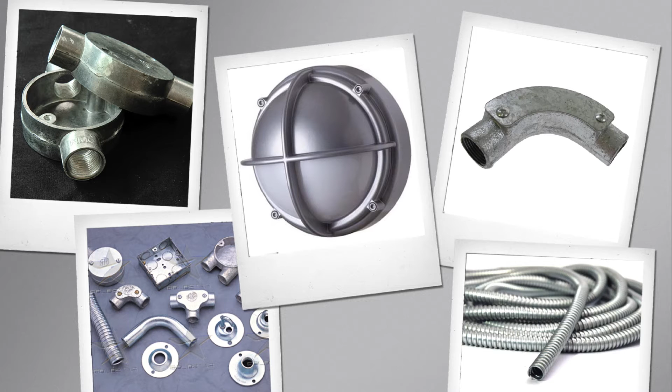But actually the complicated part was working out how to bring an electrical feed to each of these, through all the complex retaining walls around the perimeter of the site, through the granite sett finishes and so on. There's plenty of power downstairs, but getting it up through the external works was complex. In some places, we needed to use exposed metal conduit, galvanized steel, that protects the electrical cables when they're out from damage, and they give you a way of rewiring in the future.

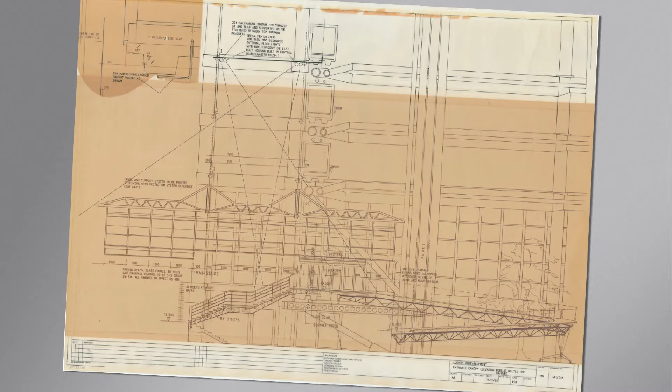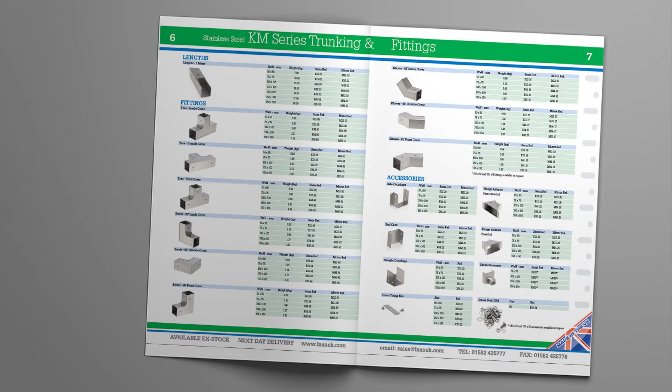Every conduit run was drawn in plan and elevation, and many three-dimensional sketches filling in the detail. I was really taken aback that an architect would want to understand every detail of such a dull engineering system. And more importantly, it meant I had to do all this research before I could give him the answer. So I owe the in-depth knowledge I retain to this day of fascinating conduit and trunking catalogues to this man.

Now, forward winding a few years and jumping from the micro to the macro, I found myself working again with Graham Stirk, this time on the initial iterations of the design that was to become the Leadenhall Building, literally across the road from Lloyds. Although both are predominantly office buildings, one was built for an owner-occupier and the other was a speculative development to be occupied by tenants yet unknown.

The wedge-shaped form of the building was driven by consideration of this key view of St Paul's. An obvious consequence of its wedge shape is the offset core, the only place where lifts, stairs and other services could reach the top of the building was on the northern side.

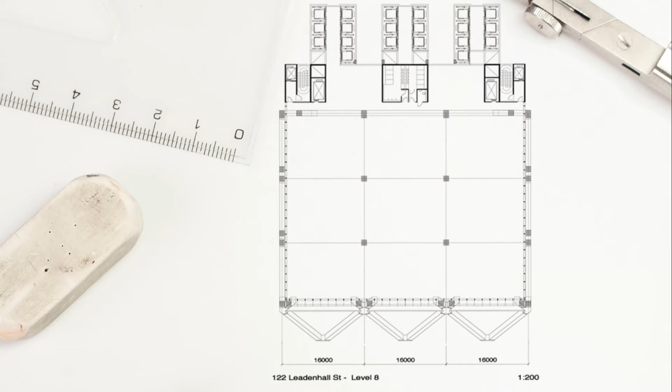Now, the building needed three banks of lifts, two goods lifts, two fire stairs, toilets, an air conditioning system for each floor, all to serve these future tenants. And for a while, we were struggling to find the right arrangement. It was difficult to meet the net to gross requirements of the developer, and the wall to floor ratio with the multiple lift cores that we began with was getting the thumbs down from the QS. It just wasn't stacking up as a viable floor plate.

I remember one key meeting when we hit upon the concept of a single core with all 22 lifts located across the full width of the site.

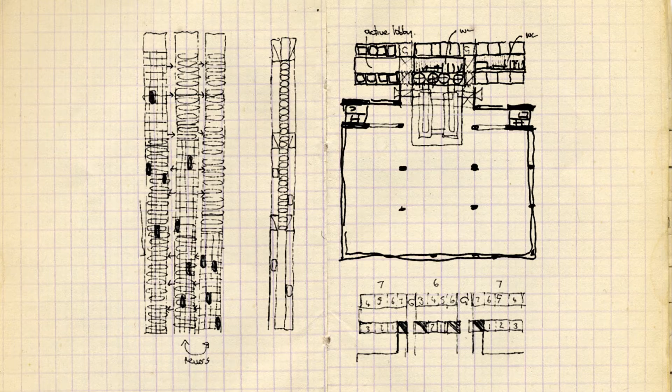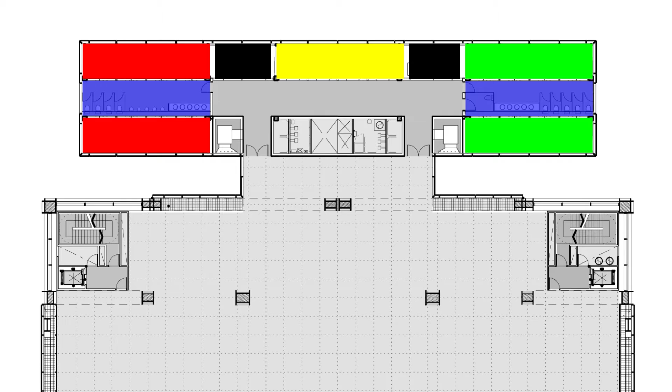This is the developed version of that same plan, with the high-rise lifts on the right, the medium rise on the left, and the low rise in the middle. And the black squares are the goods lifts. In the blind shafts of the high-rise and mid-rise, we can put the toilets on the lower levels, and then these jump across as the different lift banks become active. And finally, we squeezed the air handling units, a supply and a return, into these cupboard spaces on either side of the core. This move created a whole additional bay of office space, and we were rolling.

Although there were still 12 years to go, the power of a great diagram like this core stands the test of time throughout design development and the construction period, and it's legible to both lay and learned eyes in the final design.

Now, I think these two examples, the micro, the conduit design at Lloyds, and the north core at Leadenhall, are two examples of a design methodology known as systems thinking. It's a methodology that seeks to understand, optimize, and then organize all the components of a complex system. It's often used in other disciplines, used for designing businesses and the architecture of IT systems as well.

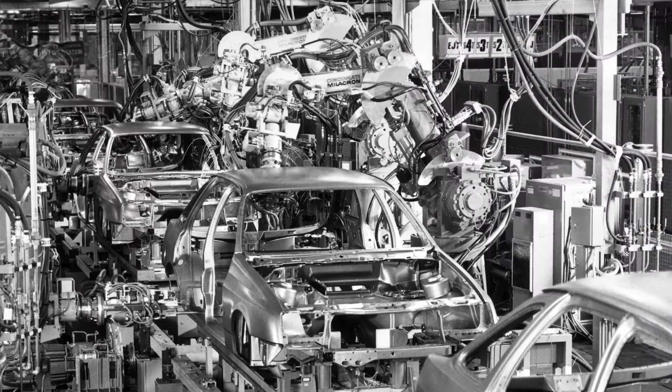In the world of buildings, it's particularly synonymous with the high-tech school of architecture. This really began in the 70s, 80s, when there was a growing frustration among many building professionals about the glacial pace of technological development in the construction industry.

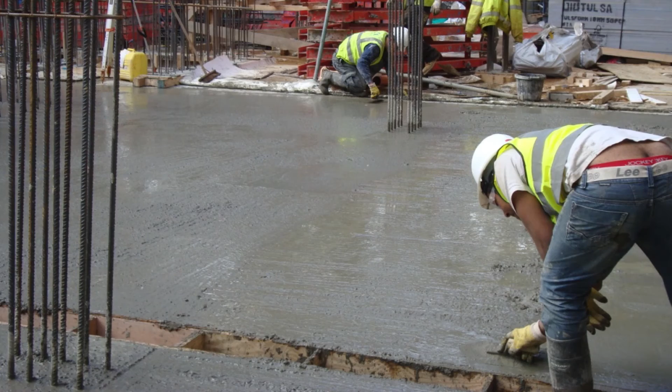This was at a time when we were still putting people on the moon, and when the automobile and aerospace industries, as well as the computer industries, were using new materials and new forms to rapidly evolve high-quality, highly reliable products assembled in new robotic factories. By comparison, construction seemed mired in messy, wet trades, and these required large amounts of labour on congested and poorly organised construction sites.

So one of the goals of the high-tech approach was to move more production off-site, and we saw the emergence of things like toilet pods and air handling pods that could bring a whole complex sub-assembly to site and plug in.

One second key idea often used in the high-tech approach is the concept of the servant and the served. I think this is Louis Kahn's original statement, that you should keep the part of the building that people use as straightforward and uncluttered as possible.

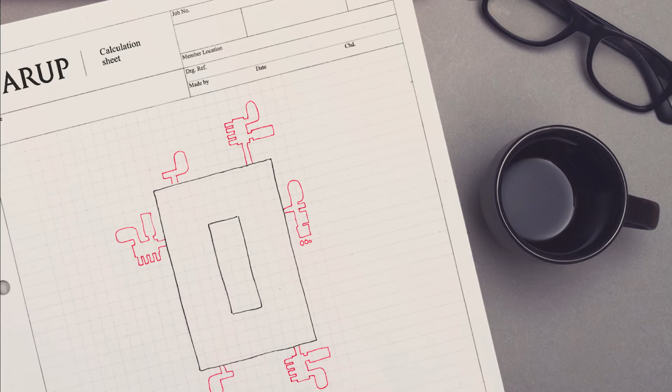So the Lloyds floor plan is a simple rectangle of usable space with an atrium in the middle. And around the perimeter are all the satellite service cores that provide the services, the vertical circulation, and the toilets. The square in the middle remains completely free for its intended use.

Linked with this is a goal of renewability, a recognition that building components have different lifespans. And by putting services and other systems outside the occupied zone, they're more readily reconfigured and updated. That's the theory anyway.

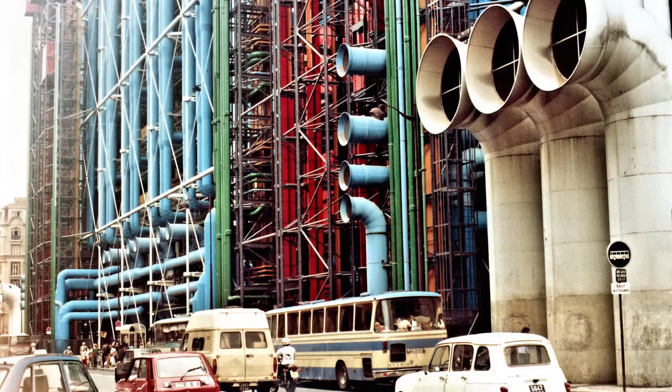Now, the high-tech movement, or school of architecture, really was a London phenomenon, surprisingly perhaps, that began in the 70s. Some people have described it literally as the body of work by Richard Rogers, Nick Grimshaw, Michael Hopkins, Norman Foster and their firms. There are sporadic examples in other places, but it's primarily a London phenomenon. And so one question is, why London?

The architectural critic Colin Davies has suggested that one enabler of the high-tech approach in London was the availability of engineering advice of the highest quality. Engineers such as Frank Newby, Felix Samuely, Tony Hunt, and Arup and all his august partners were here and ready to engage.

For those engineers, this was a great opportunity to fully engage. Some high-tech architects have said that they can't really make a start until they've had a formative conversation with an engineer to understand what the building really wants to be in terms of its technical form. For most engineers, this was quite a refreshing opportunity compared to the days when they would basically draw the structure and the services on after the architect thought they'd more or less finished.

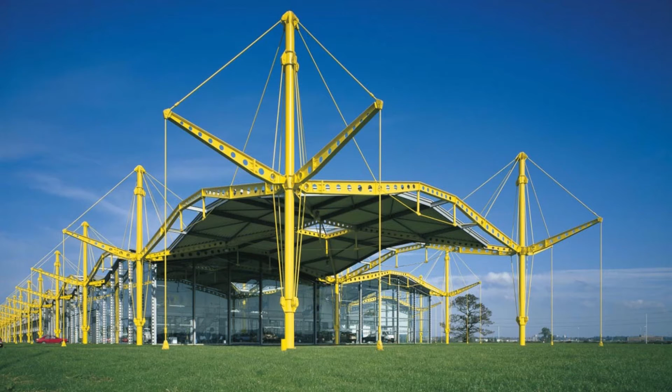Now the high-tech approach is most closely associated with things like these expressed steel structures, and many of the primary examples use steel in tension to create very lightweight enclosures. But the growing complexity of systems within buildings and the oil crisis of the early 70s put much greater emphasis on the planning and performance of building services within a high-tech building.

We saw building services engineers, such as Tom Barker here and Max Fordham, being invited to contribute to the formative stage of projects, not simply as they finished detailed design. Projects like Centre Pompidou are real graphic essays in the application of system thinking applied to services as well as structure.

I think this way of thinking led to a feeling of a shared endeavour between engineer and architect, with a number of shared goals. The first is a belief in technology and a belief that we, the design team, can harness it to create a better environment. In France, Peter Rice's understanding and exploration of glass technology helped create a new architecture of transparency and lightness.

At the Louvre, this included the two different glass pyramids that made the most of new nonlinear analytical techniques and methods of fabricating and fastening glass.

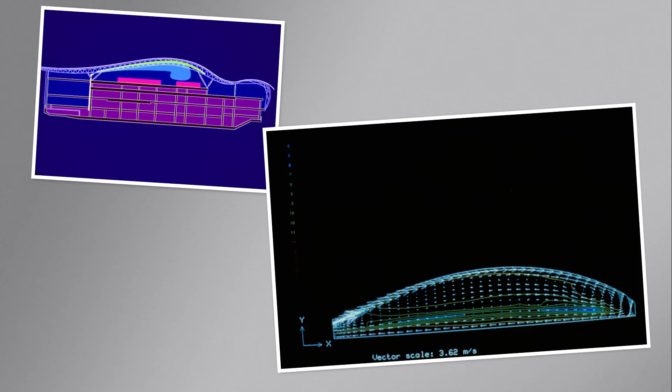Here, the form of the roof was primarily generated through an understanding of the trajectory of a cooling air jet that serves the whole of the upper concourse level - that's over 90 meters across.

This approach was really only possible because of the growing computer capacity and analytical skills we had to analyze every sort of pocket of air within that space. We could understand simultaneously its temperature, humidity, momentum, and direction. Over a week of computation, we could forecast where the air wanted to go and then wrap our building around it.

At the same time, the high-tech approach embraces the industrialization of building production and often wants to push the boundaries of current construction practice. As Peter Rice points out in his book, An Engineer Imagines, when industry resists a new idea, then the engineer has a special role in the design team to withstand these arguments and demonstrate the wrongness of the industry's position. And in this scenario, the engineer becomes critical and can save his soul.

Possibly. A second shared goal: function and efficiency. One of the tenets of high-tech is that really every design decision has a functional justification - things just don't appear in the design.

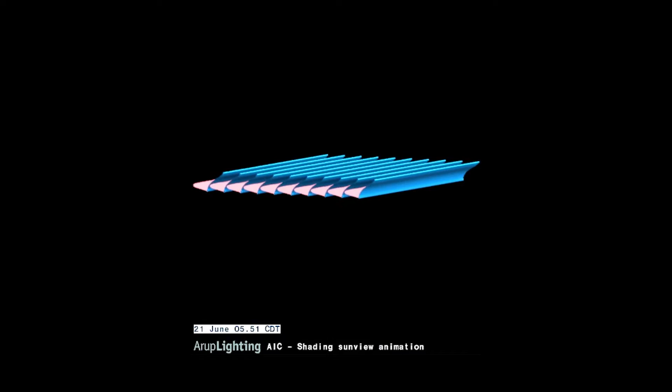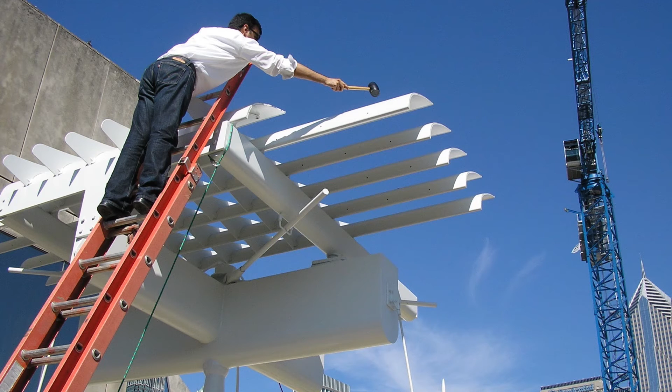One example I'd like to share here is the roof design of the Art Institute of Chicago, because it follows this principle. The components of the shading canopy above the third floor galleries, known as the flying carpet, are designed to keep all direct sun off the gallery skylights beneath. Every dimension of this shading system has been honed to the minimum by technical considerations: the solar geometry, ice formation, and wind-induced vibration.

This is one of our most senior acousticians working out the natural frequency of the structure by the age-old method of hitting it hard with a hammer and listening to the sort of bong it made.

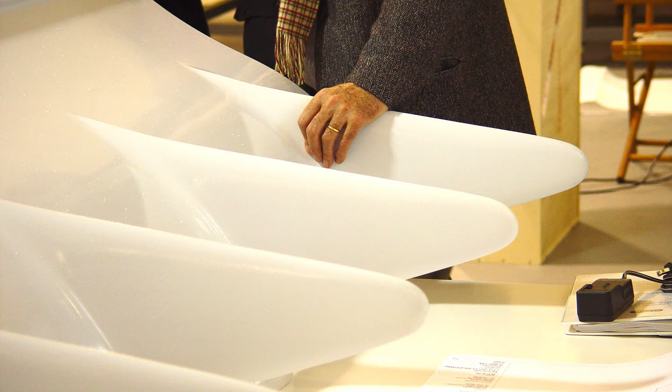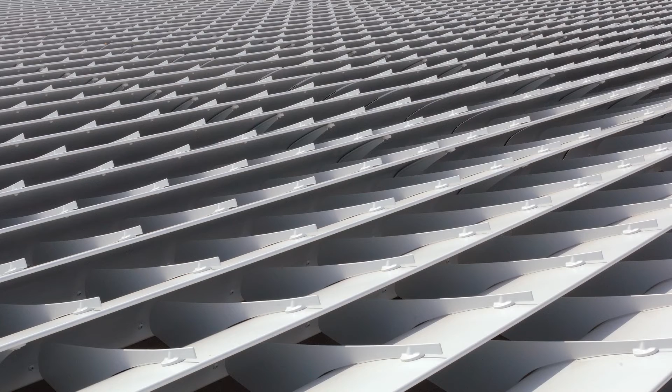In skillful hands, these elements become iconic parts within the overall building form. They become one of the signature architectural pieces, whilst also being completely functional. Every piece is necessary and just sufficient for the job it needs to do, but the ensemble together creates a rhythm of light and shadow that requires no further embellishment.

A third and linked goal is about legibility, all the way from a concept diagram through to the finished form. This is another Renzo Piano roof, this time at the Beyeler Foundation in Basel.

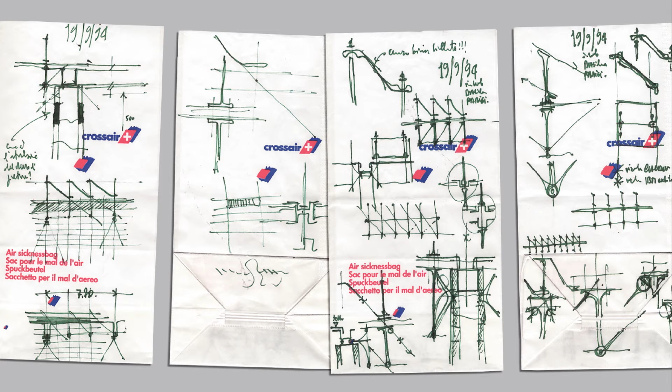These are the very first sketches created on air sickness bags from one of Renzo's flights, and it shows the beginning of the evolution of an idea of a layered approach to the roof design. This sketch on the left shows those different components.

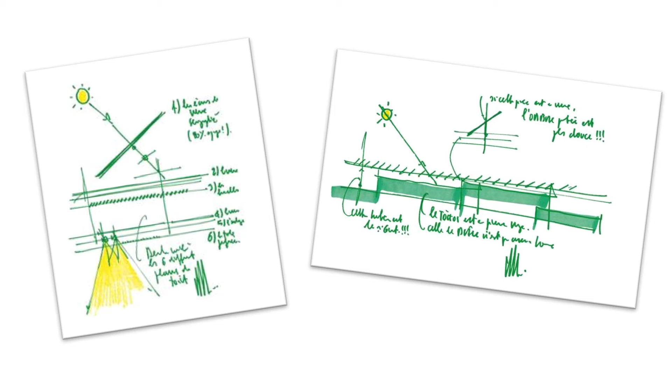There's an external glass brise-soleil that keeps off the direct sun, a skylight beneath that keeps the weather out and also absorbs UV radiation, and then some motorized blinds that regulate the light before it reaches the ceiling of the space, which is formed by perforated metal sheets with a paper insert. So each layer doing a defined job and being legible in the way it does that.

Now, on to the dangerous bit here. Of course, there are many other valid design approaches to architecture—explorations of fluidity, parametricism, and the emotional and social responses of different building forms. Many of these pose interesting and demanding challenges for engineers as well. It can be very engaging to learn a new language and a new aesthetic with a new architect.

But somehow, often the goals are more rarely aligned. The engineering diagram becomes forced and can be distorted by other factors. Or, as the engineering becomes hidden away again, it can become banal—perhaps efficient and rational, but no longer celebrated in the completed form. The engineering expression is subsumed to a different, although quite possibly much more important, agenda.